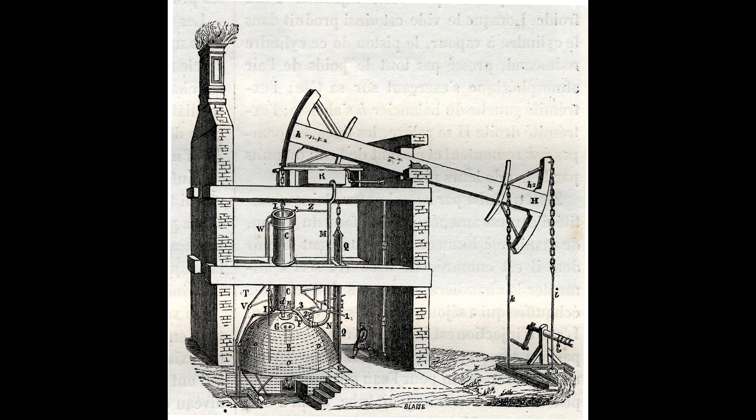But first, we need to go back to the 18th century. For thousands of years, wind, water and horse were the main ways of powering things, and whilst the idea of using steam had been around for some time, and a lot of people were experimenting with it, the first machine to really harness it properly was invented by Thomas Newcomen in 1712.

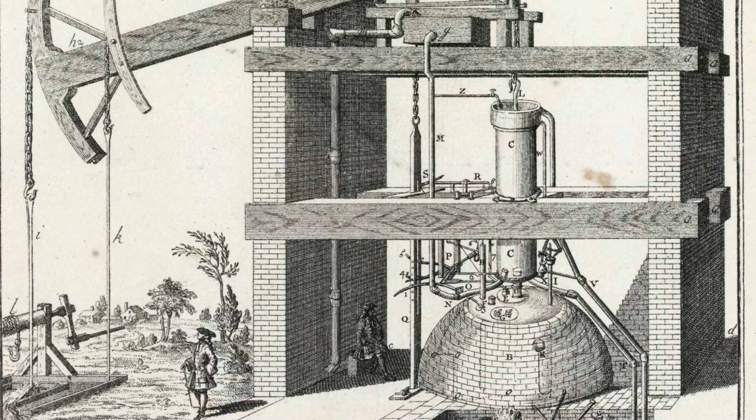This was used to pump water out of mines and it revolutionised industry, becoming the standard type of steam engine in Britain for almost 70 years. It underwent a lot of improvements. John Smeaton from Leeds made it much bigger and more effective. James Pickard used a crank to enable it to turn a wheel, a very important development called rotary motion.

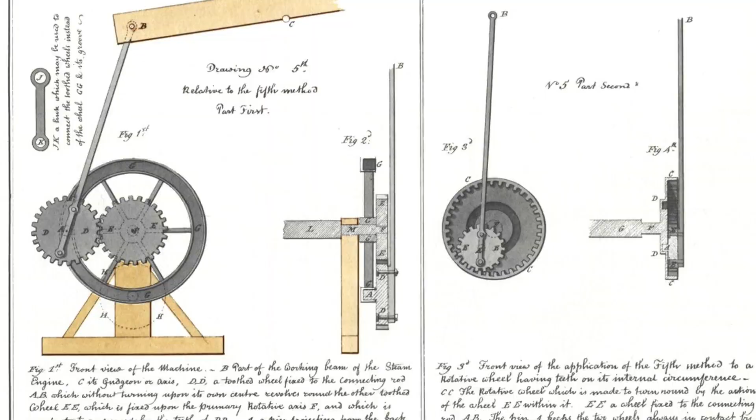But it was James Watt who most importantly and famously improved it in 1776, causing an explosion in popularity. As his business partner Matthew Boulton said in 1781, people went steam mill mad. Okay, so let's put a pin in steam for the moment and come back to it later, because we need

to talk about Middleton. Middleton is an area of South Leeds which had been involved in coal mining since the 13th century. The mine-owning Brandling family from Tyneside acquired the Middleton estate through marriage and greatly expanded the works in the 18th century as the demand for coal grew, and kept growing. Leeds was a hungry city and the collieries kept having to get bigger and bigger to produce more coal to meet with the demand. Sometimes the sheer demand for coal outstripped supply.

In 1792, the mayor proclaimed in the Leeds Mercury that, in response to a petition signed by 10 prominent citizens, he would hold a public meeting to discuss the best means to ensure a suitable supply at all seasons, bearing in mind the distress which was occasioned in this town and vicinity last winter by the want of a proper supply of coals.

In 1793, the quota for coal wagons delivered into the city was raised to 64 wagons a day, 6 days a week. In 1803, that needed to be raised again to 80 wagons a day. Assuming that's 6 days a week, that's over 450 wagons of coal needing to be delivered to Leeds each week. Now you imagine that, but across Britain.

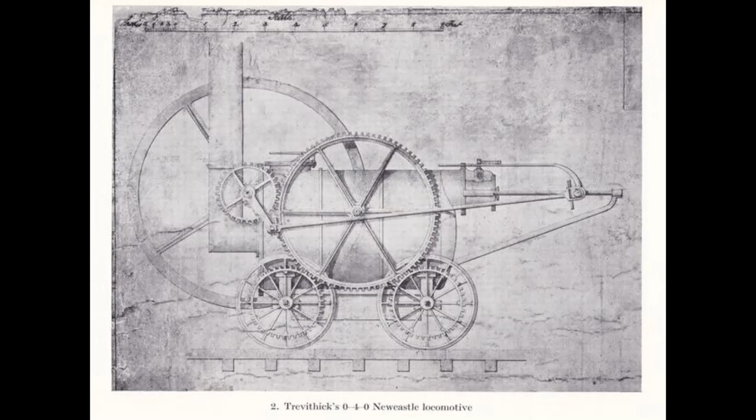Witnessing firsthand the rising costs and difficulties surrounding horse-pulled wagons, he began to think of alternative ways of transporting coal. It's likely that he was inspired by Richard Trevithick, that other great pioneer of steam. In 1804, when Blenkinsop was still in the northeast, a colliery owner in Gateshead built a machine according to Trevithick's design, and it's possible that Blenkinsop had heard about it.

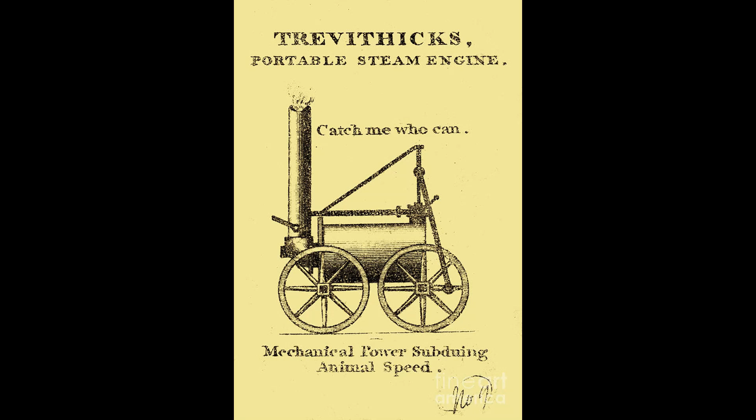Trevithick's last machine, Catch Me Who Can, was built in 1808 and took passengers round a circular track in London, rather like a fairground ride, thus becoming the world's first locomotive to carry fare-paying passengers. However, though Trevithick's machines were certainly revolutionary and groundbreaking, they became groundbreaking in other ways. They were far too heavy for the rails. Made only of iron, these rails would break under the weight of the machines, and so these locomotives weren't commercially viable. The solution came from Murray and Blenkinsop.

They devised what's called the rack and pinion method. Basically, the wheels would sit on the rails as normal, but the rails had little cogged teeth on the side, like one side of a zip, which a cogged wheel would grab onto and use to pull the locomotive forward. This method had been used by Murray before in many of his industrial machines, but it took the two of them together to come up with a way of applying it to a locomotive.

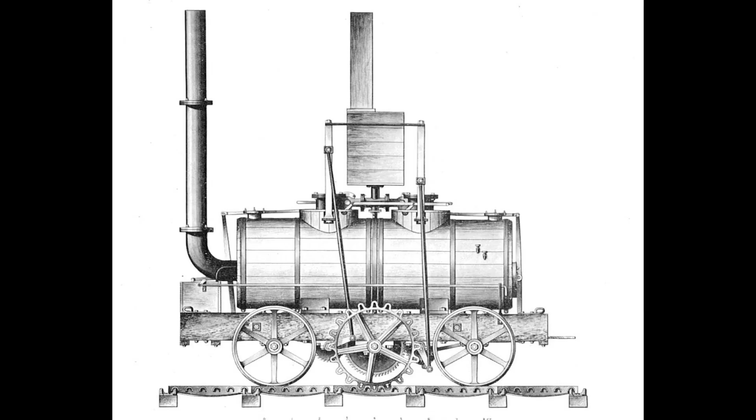They also added an extra cylinder, which no other locomotive before this had done. This made it work more efficiently, and in fact, every single locomotive made after it had 2 or more cylinders. Patented in 1811, it was tried out on a test track and then immediately put into service, as the Leeds Mercury recorded on that pioneering day in June 1812.

On Wednesday last, a highly interesting experiment was made with a machine constructed by Messrs. Fenton, Murray and Wood of this place, under the direction of Mr. John Blenkinsop, the patentee, for the purpose of substituting the agency of steam for the use of horses in the conveyance of coals on the iron railway from the mines of J.C. Brandling, Esquire, at Middleton to Leeds. This machine is, in fact, a steam engine of 4 horses power, which, with the assistance of cranks turning a cog wheel and iron cogs placed at one side of the railway, is capable of moving, when lightly loaded, at the speed of 10 miles an hour.

At 4 o'clock in the afternoon, the machine ran from the coal staith to the top of Hunslet Moor, where 6, and afterwards 8 wagons of coal, each weighing 3 tons, were hooked to the back part. With this immense weight, to which as it approached the town was superadded about 50 of the spectators mounted upon the wagons, it set off on its return to the coal staith, and performed the journey, a distance of about 1.5 miles, principally on a dead level, in 23 minutes, without the slightest accident.

The experiment, which was witnessed by thousands of spectators, was crowned with complete success, and when it is considered that this invention is applicable to all railroads, and that upon the works of Mr. Brandling alone, the use of 50 horses will be dispensed with, and the corn necessary for the consumption of at least 200 men saved, we cannot forbear to hail the invention as of vast public utility, and to rank the inventor amongst the benefactors of his country.

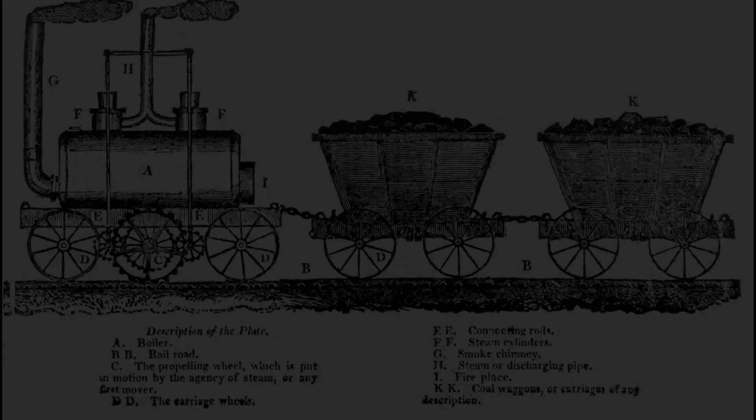This illustration of the machine, later named Salamanca after a British victory in Spain, was published in the Mercury and is probably the world's first newspaper illustration of a locomotive. Over time, 6 or 7 locomotives of this type, with some later developments, were built and became essentially the first class of engines. Blenkinsop estimated that each engine could do the work of 16 horses in 12 hours.

In a letter from 1813, he recorded that the cost of keeping 16 horses and 8 drivers was £1,360. That's about £63,000 in today's money. The cost for maintaining an engine and driver for a year, £160, or about £7,000 in today's money. The impact of this was tremendous, and in 1814 the colliery reached its all-time highest output, 100,000 tonnes of coal.

However, if you've watched my Luddites video, it won't come as much surprise to learn that a lot of people weren't very happy about having their jobs replaced by machines. On New Year's Eve 1812, a group of them placed large rocks and loose rails on the tracks, which damaged some of the engines. So seriously did Blenkinsop take this that he offered 50 guineas, more than some men's annual pay, as reward for information.

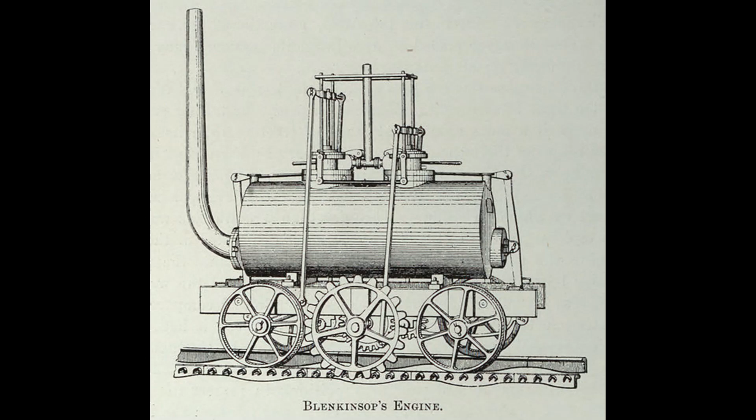Okay, so we have to talk about Stephenson. In 1813, Blenkinsop gave one of his machines to a colliery in Newcastle. Named Willington, it debuted to much public spectacle and was said to replace the work of 40 horses. One of the witnesses was George Stephenson, who remarked scornfully that he could make a better engine than that to go upon legs, and immediately set to work on making his own engine.

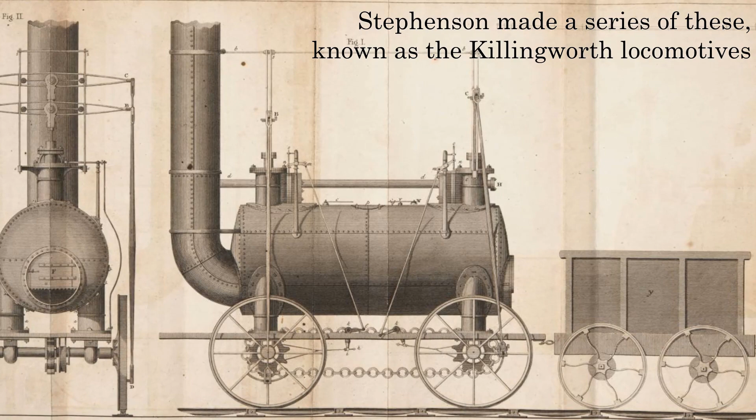Named Blucher, after the Prussian general, it debuted in 1814 but could only draw 30 tons at 4 miles an hour, whilst Murray and Blenkinsop's original engine could draw more than 90 tons at that speed. Stephenson's son Robert, in a biography of his father published in 1862, admitted that the construction of my father's first engine was very much after the same plan as that made by Mr. Blenkinsop. So Stephenson basically stole the Blenkinsop engine without giving due credit, and it's a real shame because for a time Murray and Blenkinsop became the railway celebrities which Stephenson is today.

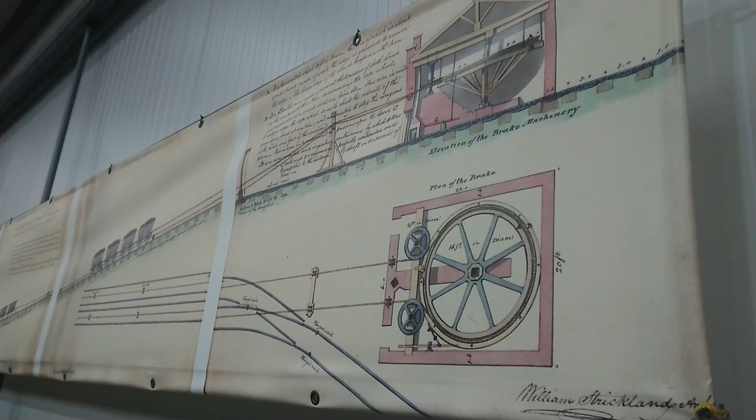People from all over the world came to visit Middleton. The American William Strickland produced a detailed illustration of the railway in 1825, giving us a fascinating glimpse into how it worked at the time. It was featured in a leading French industrial publication. Engineers from Germany came and took the design back with them to Berlin, where they were the first steam locomotives to be built in mainland Europe. In 1815, the consul for the United States in Liverpool ordered several engines for use in steamships on the Mississippi.

The Grand Duke Nicholas I, later Tsar, watched the demonstration and was given a model of the locomotive by Murray, and even the Prince Regent, later George IV, was informed of the machine by a letter from an excited onlooker. And what makes this even better is that at the time, Stephenson was jealous of the attention which Murray and Blenkinsop were getting. As his biographer rather scathingly wrote, Blenkinsop's clumsier and less successful engine excited far more interest, partly perhaps because it was close to the large town of Leeds and used to be visited by strangers as one of the few objects of interest in that place.

Murray died in 1826 at the age of 60. On his death, the Leeds Mercury said that he was a man whose mechanical abilities were perhaps inferior to none. His great improvements in the steam engine, flax spinning and other machinery will be a lasting testimony of his unceasing labours. He was buried in Holbeck Cemetery and a cast iron monument was raised in his honour by members of the foundry. He never lived to see Stephenson's Rocket debut.